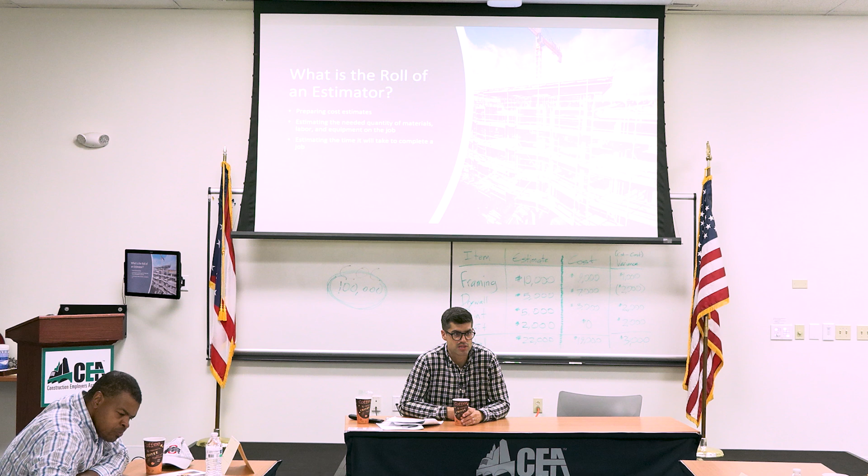There's software that I'm actually teaching a class Tuesday on, Bluebeam and Procore. We typically teach our students in courses like this generalized software. We don't go into very specific ones because companies do it differently, companies use it different ways. We use RS Means to get some historical data, and National Estimator, and other things like this. But ultimately it comes down to your individual process.

I actually came out in 2010, that's when a lot of the technology shift was changing. I remember we got iPads on our first Turner job, I played Angry Birds on it. I just didn't like it, honestly. We would just take pictures and do some RFIs on it and stuff like that.

The technology now is very digitally driven. Our students prefer digital, I'm just not like that. I like hard prints, I like writing things. I'm probably the last of my kind, who's now coming out after me. Some of you guys are like us moving into the future, or who are older from that 2010 period and on, but now the students know it's all digital. I just can't keep things straight.

The problem is you have to be trained in it, you have to be well versed in it. But my general feeling is, as long as your number is accurate, like Mark, if you're handing me a piece of paper and it's accurate, I don't care. I've handed subcontractors schedules on napkins before, and it's worked. We really translate and put value on things that actually work in the field. So don't get too caught up in 'I'm using Timberline' or 'we have to use this or that.' Ultimately, it comes down to accuracy.

We'll make sure we can put it in whatever we need for the Cleveland Clinic or whatever it may be. Ultimately, it comes down to the accuracy of numbers.

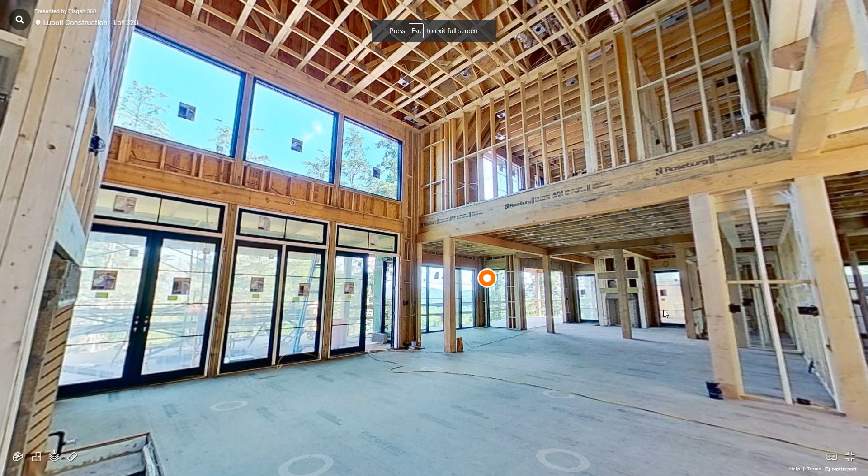Why this is so important for us is we have to build this into our estimates. Here's the cool part with technology, guys: if you can prove the value to the client, it's a moneymaker. You're going to bill that cost to the client and make money off of it. I'll give you guys a great example.

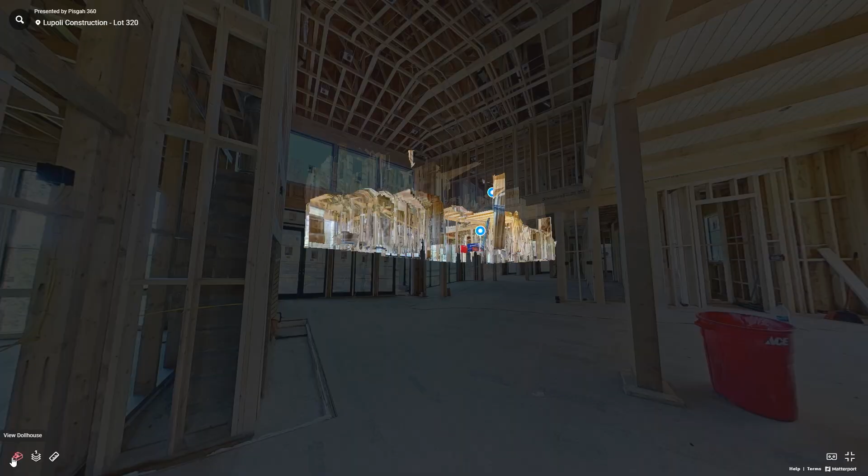So this is called Matterport, okay? Matterport's awesome. It's awesome, dude. Yeah, it is awesome. This is such a low cost, it's $130 a month for a really, really good plan. You can do it from your phone or you can do it from a camera that's here.

What you can do, and I always recommend this for people - you guys should think about this from an estimating standpoint if you're estimating an existing structure - you can go hire a little intern, or anybody, to go around and scan this project for you. This is why I tell you that you should always put your eyes on projects, and this could be a way to do it, okay.

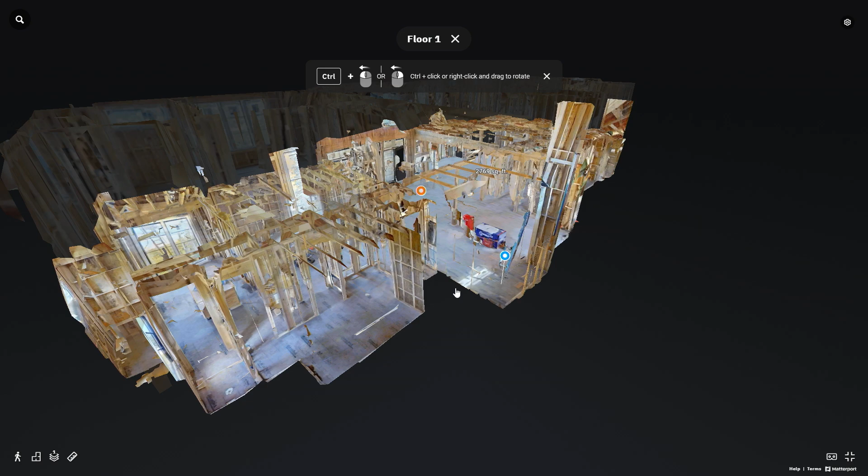What you do is you create what's called the dollhouse view, right? But what's really cool is what we're now doing from a CM standpoint is I'll embed the O&M, operation and maintenance documents, in the file. So we can say, here you go, Mr. and Mrs. Client. Everywhere you see a little circle is where a node was taken, and all you do is set up the camera and it does a little 360, pick it up.

Take it in there, spin it really quick. And what you can do is just bury these nodes, and in that node it could be a YouTube video of how to maintain an HVAC unit, or it could be your warranty documents. So now instead of printing all these things and handing the client all this paperwork, you just say, here's the link.

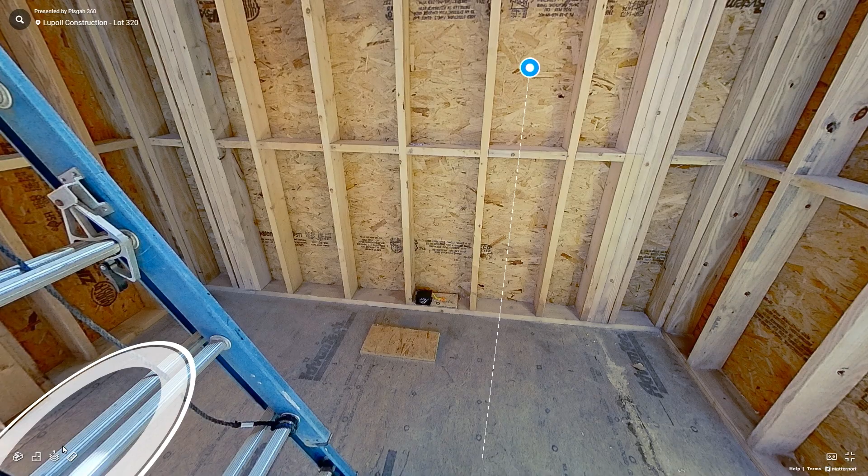You can walk through that structure. And now you can also measure, you can do your estimates completely remote, taking very accurate measurements - that's an 8'1" wall right there. This is such a low cost to entry, utilizing this, that's why I always say there should be no excuse for you not visually putting your eyes on a job, just like Mark's saying.

You have to, in conjunction with all the documents, especially if the documents are getting worse - you have to visually put yourself in this position.

Now here's the cool part. I'm actually doing a study right now. So when COVID hit, inspectors started accepting a lot more digital pictures for inspections. And what I'm trying to really push in the state of Ohio, and I'm getting a lot of pushback from them, is a set of guidelines and standard operating procedures for contractors to just submit visual proof for inspections. So that inspector doesn't need to climb to the 17th floor of Sherwin-Williams and put his or her eyes on the mechanical rough-in inspection - you can just send them a digital file.

And there's a lot of pushback - oh, well, I want to put my eyes on it, these contractors try to cheat. Have you guys ever tried to cheat in 4K?

It's very, very hard. The technology is getting to the point that we can put so much data at such a crisp rate that it's impossible to cheat. With this file, you're on record, right?

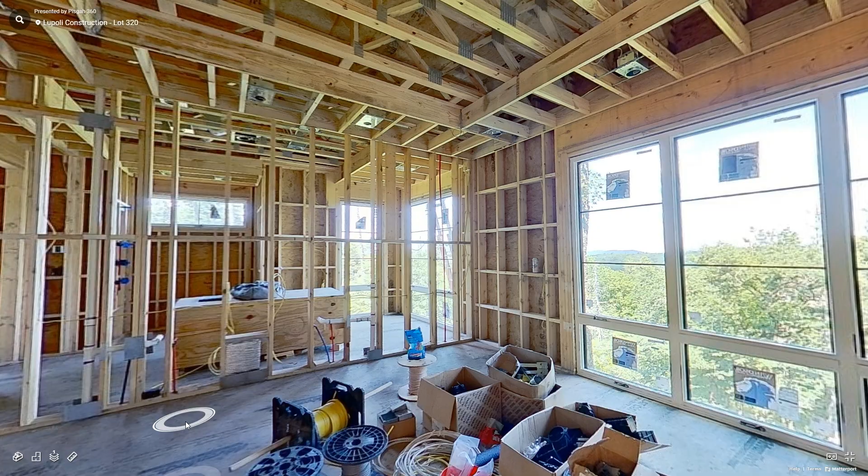It's hard to cheat in 4K. Like I said, you can get real tight, you can see your 12-2, you can see different things, and it's there.

And again, here's how we sell it from an estimating standpoint—I build that cost in. And then the client might say, well, wow, you have this additional overhead cost, but then you show them the value it delivers them. Hey, when you guys go to do a renovation or a change and you need to know where wires are at, I've got your rough-in images right here. You can check it out. You need project documentation, warranty information—it's all there.

And then you build profit into that. So you bill the client $500 a month for your technology and it's costing you $130 out of your pocket. But because you've provided value, just like Turner Construction did with Ladders Last, it's now a profit area for you. But again, at what level do we want to invest in this? You got to make sure it's going to provide you that return on investment.

If you're going to spend a ton of money on AI, you might not see that right now with the level of technology there is. But this thing is freaking incredible—it's called RPD 35. I saw this at ConExpo, a completely autonomous vehicle.

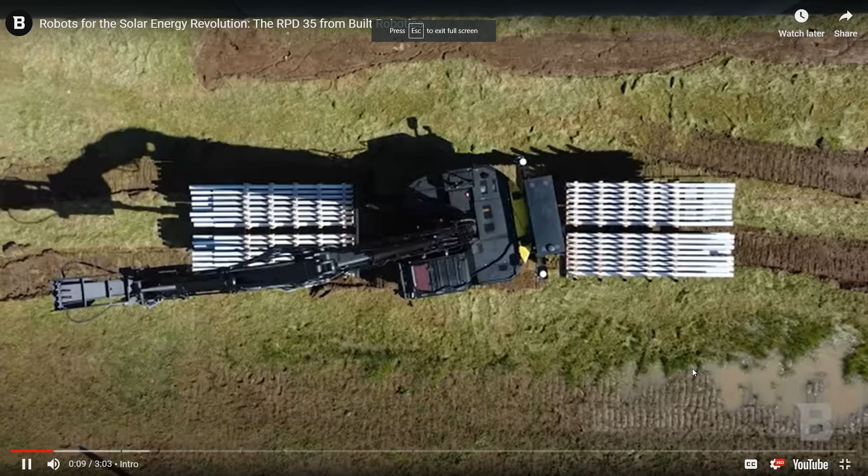Here at Built Robotics, we've developed the RPD 35. RPD stands for Robotic Pile Driver. This system allows for the automation of the pile driving process in the production of solar farms.

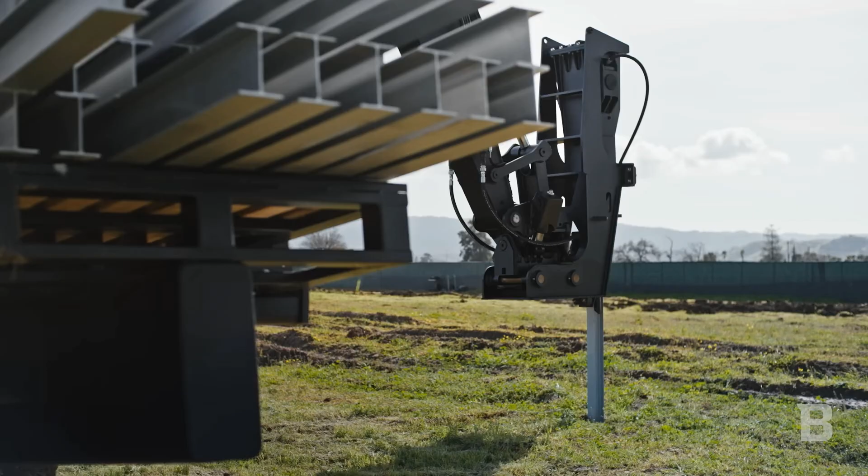The solar industry is going through huge growth. By the way, to give you guys a standpoint from our construction management students, solar is the highest paying, fastest growing segment that we have in the building industry, and they're the highest paying for our students. The money they are putting and throwing at these kids is ridiculous. We're currently at about 3% production, and the goal is to be at like 50%. They're building solar fields.

The kids have sent me pictures of hundreds of acres in Texas, Minnesota, by the way. The technology is there where they're building solar in areas you would never think. If you guys have money to invest in something, I tell people solar. I don't want to politicize it because it's an energy source, but from what I'm observing in the data, it is growing like crazy.

So here's a company and organization that saw, hey, there's a way we can do this faster and better. Just take a look.

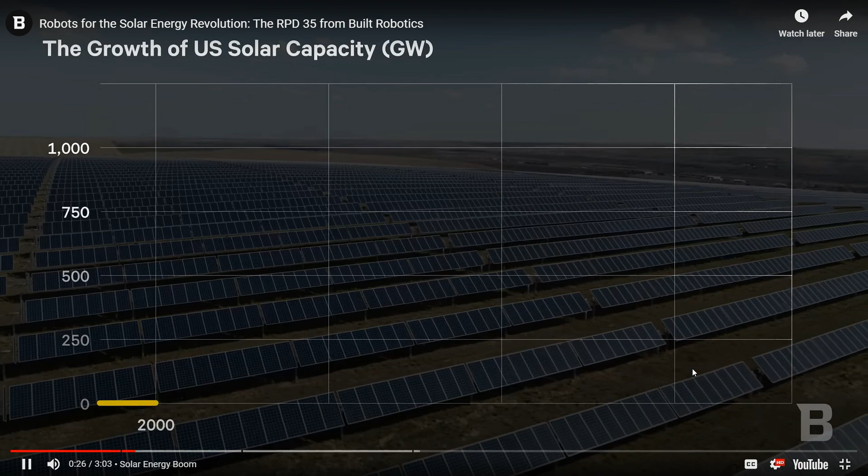We plan to run half of our country off of solar, and currently we're only at 3%, so we've got a long way to go. We're going to see a huge increase in demand for solar energy and renewables in general.

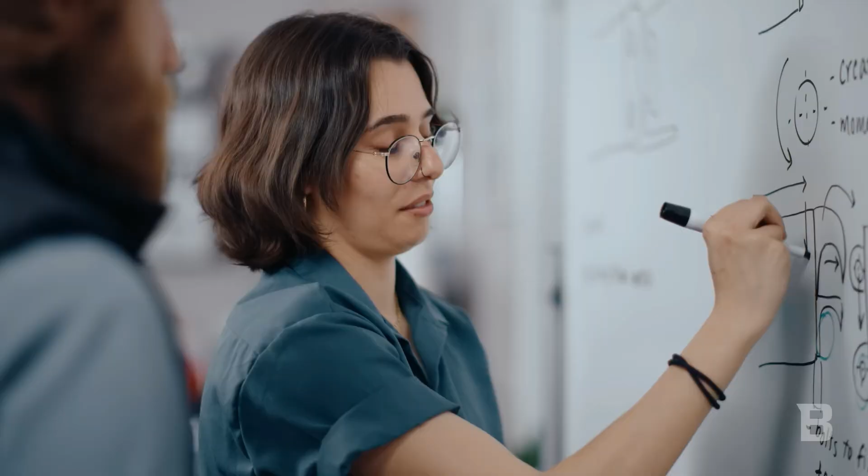I think the most difficult part about manually driving piles is just lifting them constantly. It's a very labor-intensive task, and we knew that we could develop technology and tools that skilled workers could use to improve the process. We're talking a repetitive task tens of thousands of times.

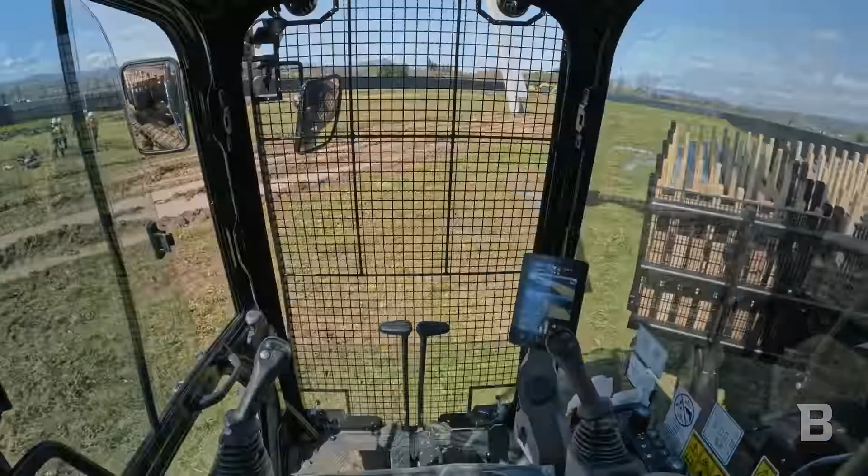This is where automation and robots come into play. Automating these tasks reduces the risk for humans and provides a safer environment. There's no one in there - it's completely autonomous. This process allows solar farms to occur much more quickly.

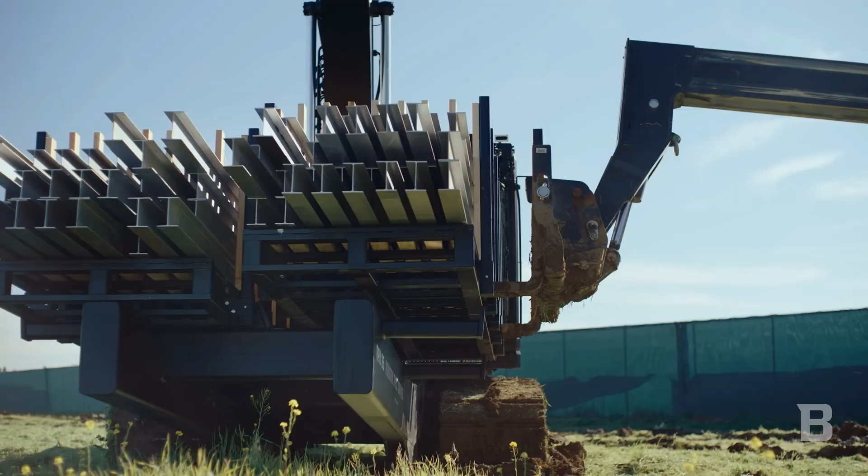They're driving the piles down to sub-centimeter accuracy, carrying the piles on board. No longer do we need to shake them out or distribute them along the property - they're on board the excavator itself. It picks from those on board and does the pull test. Normally for every pile, they'd have to bring another machine to do a pull test, but it will drive it and then do the pull test right then and there.

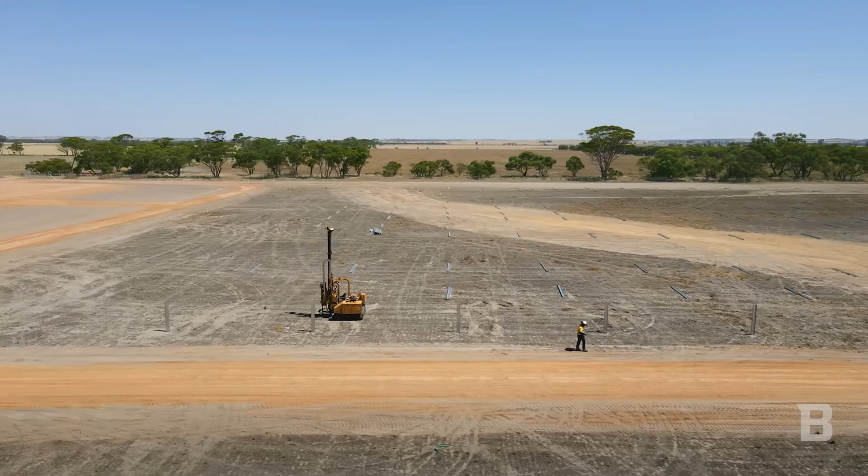Typically, a manual crew is able to put about 100 piles in the ground a day. With the RPD 35, we can get over 300.

The first is a sled, which is tubes underneath the excavator. The second part is the baskets, which can hold up to 200 piles in a specific location - a sexier, cooler way to operate that machinery that I think would attract people.

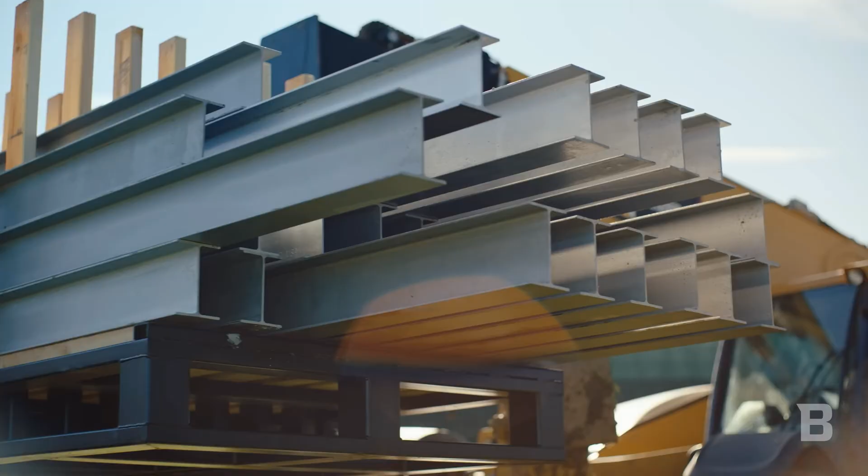And everyone says, well, we're losing jobs. We need this system, which is the brain, not to lose jobs - really, we need people. Our software produces a pile sequence. The baskets on board the excavator are loaded in a particular sequence that allows for placement of those piles in the exact right position and order.

We're talking sub-centimeter accuracy. So now you can be a tradesman and operate technology versus physically putting pile drivers in and shaking out beams all day.

The safety system is comprised of hardwired e-stops, wireless e-stops, indicators for sound and lights, a geofence, a physical safety barrier, pedestrian detection, the Guardian system, and signage on the robot.

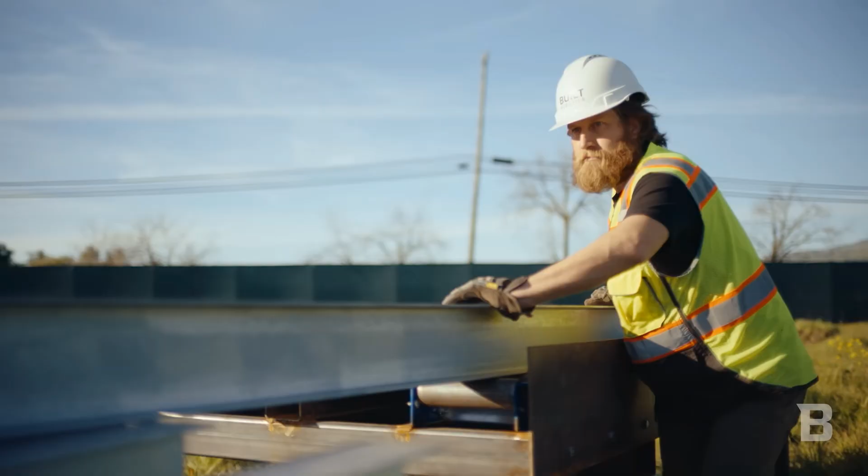We started off with trenching on these solar projects. Today, our latest product involves pile driving, but there's so much more that can be automated in this industry. Here at Built, we're in it for the long haul. We believe that in order to meet the demands of the future, automation is going to be key in construction.

The construction exhibition in Vegas, every 4 years, it's all going this way. One of my coworkers was telling me about some project she was watching on YouTube where the guy was in China operating something in another country.

I was going to show you the video. Oh okay, no I know what it is - the guy's in Germany operating an excavator in South Korea. Oh, there you go, you see the South Korean flag flying? And it might have been - there's other countries that use it too.

So now they're remote operating excavators across the world. When the South Korean folks are going home at 3:30 p.m., it's 7 a.m. in Germany, and that piece of equipment is operated completely remotely from Germany. I'll show you the video here in a second - it's a short clip. You'll see in South Korea it's completely dark and they're still excavating, still trenching, all completely remote.

You guys, we are going to meet excavating contractors who work remote. Literally, I'm a construction heavy operator and I work from home. It's coming. And at what level do we put that in our estimate? At what level can we show that cost? Now, typically this is what we see in the United States, guys.

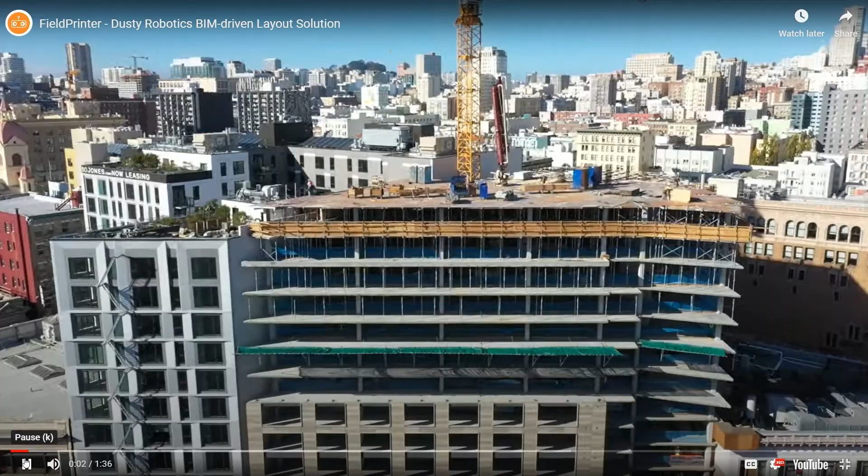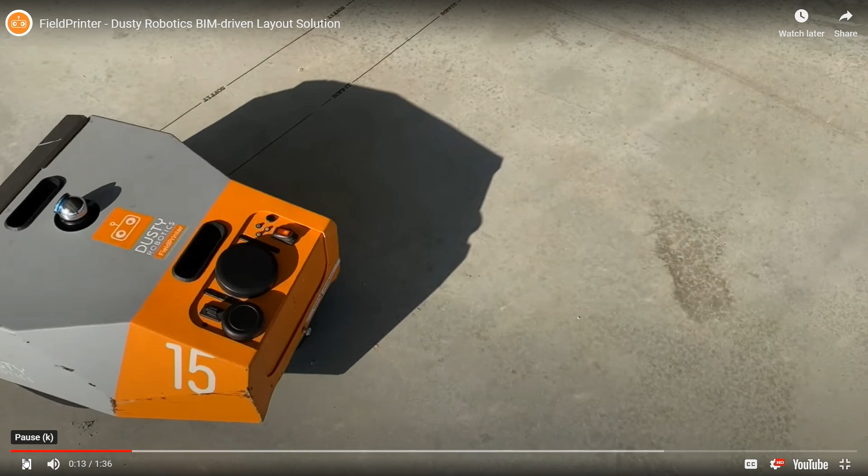Check this out. So we've got our cast-in-place concrete, and we're starting to lay out our stud walls. You upload your file right to Dusty and it prints it right out for you.

So again, Tommy and I aren't getting on our hands and knees snapping lines. I might otherwise need a crew of six carpenters to lay out the whole floor. Here's the other cool thing: it puts your outlets, it puts all your overhead light fixtures, and it prints right on the floor where your stud walls are going.

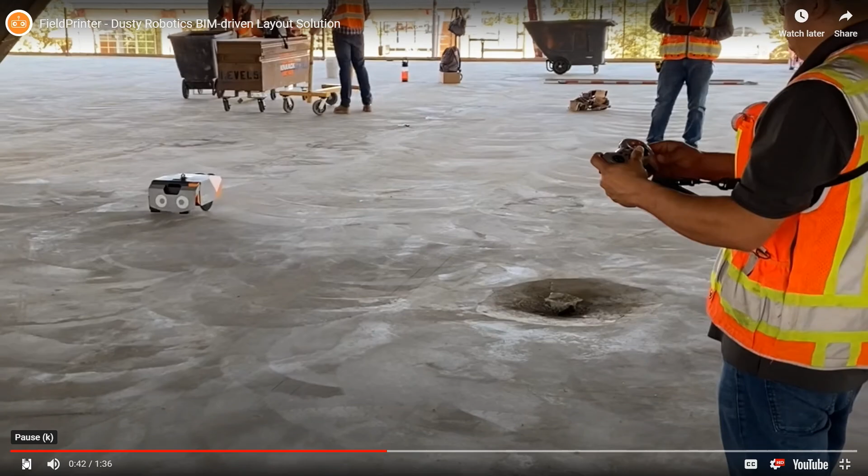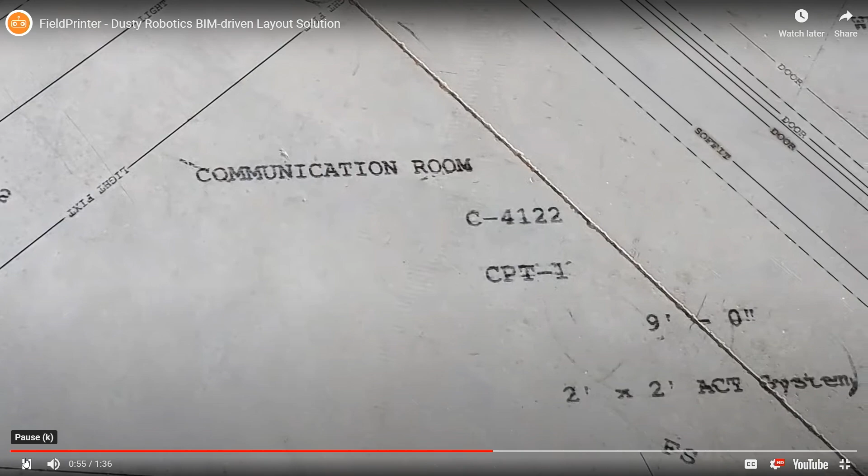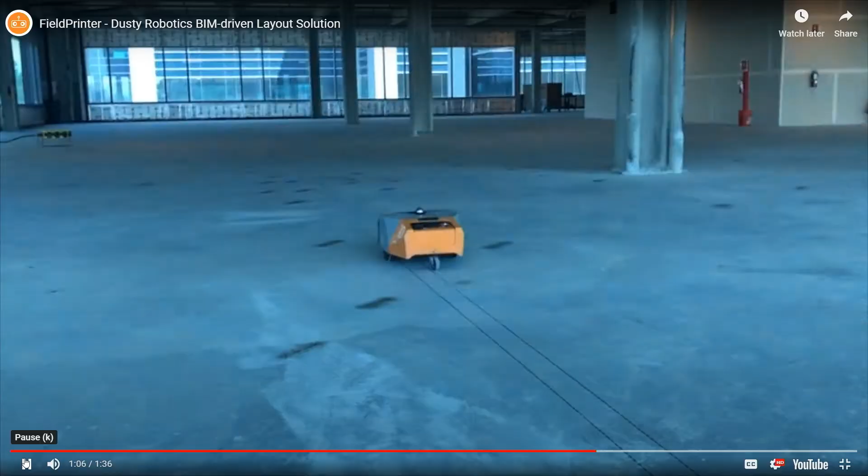So why aren't we training our carpenters on this to save your knees, save your back, save all the thought process that goes behind it? Now, I'm also torn on that a little bit. You need to be able to know how to lay out walls. You've got to know how to lay out walls.

And this, as a carpenter, you're not going to be using on every job, I wouldn't think. Like this room, it probably wouldn't make sense - we could lay this out relatively quickly. So I think integrating this stuff smartly will help us at some point, and we need to think about that from an estimating standpoint.

Wow, we really got on a tangent after the ability to read blueprints, but it's so true. Maybe it's the ability to read BIM models, maybe it's the ability to read a user manual on the RPD 35. These are the ways we're moving in the future, and I believe in our industry we need it to supplement. You need to think about the right investment, and whether our interjection of technology actually works for the bid package we're utilizing.

I've done jobs where it doesn't make sense - we don't need Matterport, we don't need a drone, we don't need any of this stuff. We're just good old, hard, salt-of-the-earth construction. But what we talk about in our class, the one I'm doing on Tuesday with Procore and Bluebeam, is that I do think there's a minimum level of technology.

I don't know if you guys have heard of Procore or utilized that at all. Bluebeam is an interactive PDF. Procore, for example, is a digital platform that houses all of your construction documents - like a cloud drive that the owner can access, subcontractors can access. It really just helps you manage the digital flow of the job, and it's very low hanging fruit - a low cost thing, just like some of those technologies we showed. You can show stuff in real time, access RFIs as a contract manager in Canada, for example, whatever it may be.

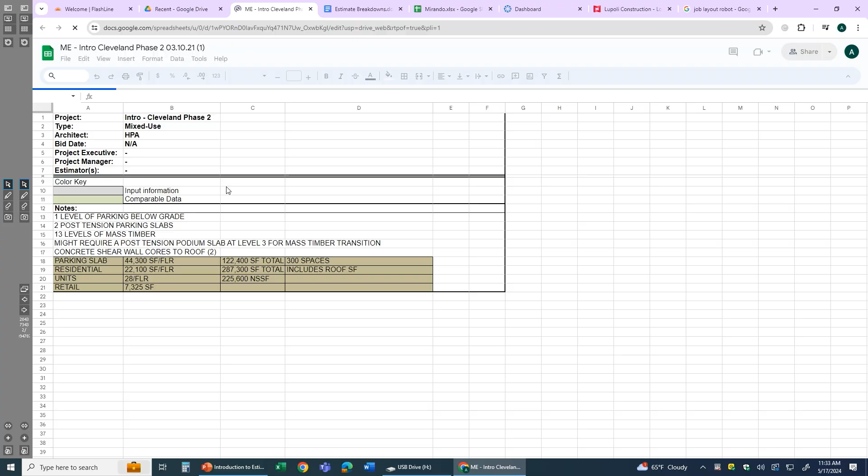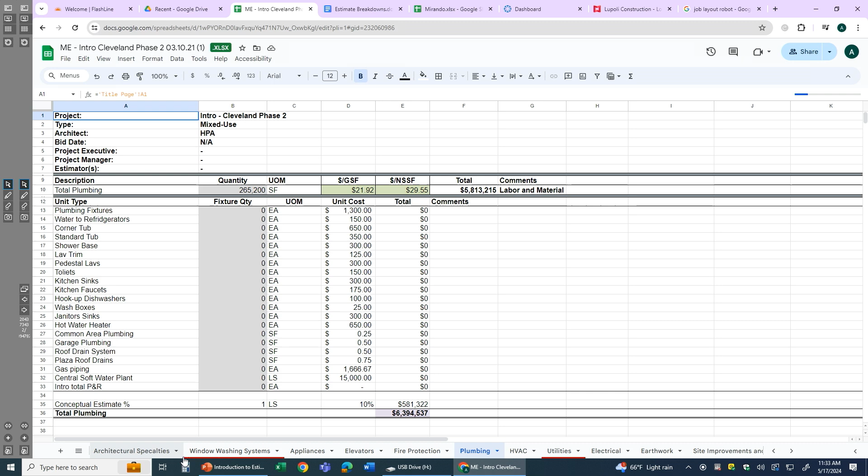Okay, so this is that document I was telling you about where I capture everything. This is an Excel spreadsheet. And if you look at the bottom here, there's a bunch of tabs, okay? On these tabs is where I store my historical data. Is where I put in elevator costs, appliances, fire protection, plumbing, whatever it may be. This is what I call my project ratio comparison. And this is where I store all the historical data for my projects in one central area.

Again, y'all really got to focus on how you store and disseminate data. Have you guys ever sat, like when I was writing or doing my dissertation, I would have like 50 tabs open, it'd take me 7, 8 clicks to get to where I needed to be. And then I'd go, you know how much time I wasted in just clicks, and just not knowing where things were organized or what they were named? I'm telling you, you need to really invest in that. Bill Gates did a study, like he has 6 monitors. If you ever read about any of his productivity, he has 6 monitors up in his office at one time because he's found he can just be so much more productive with that amount of monitors. He spent a ton of time and money investing in his process, right?

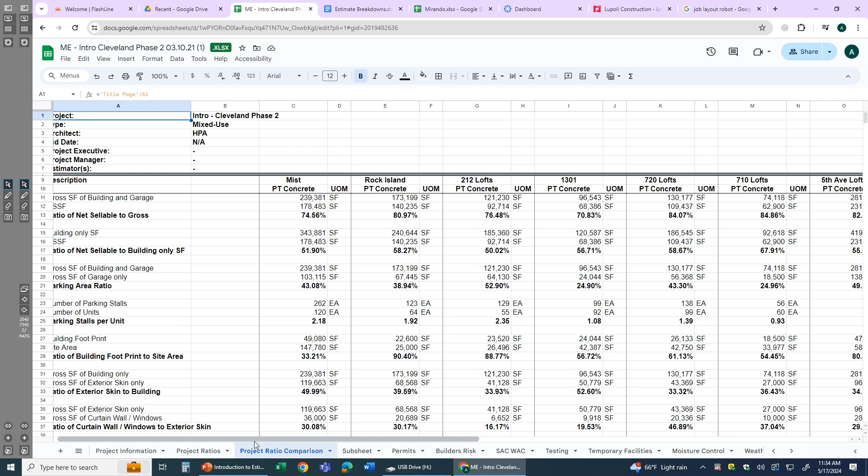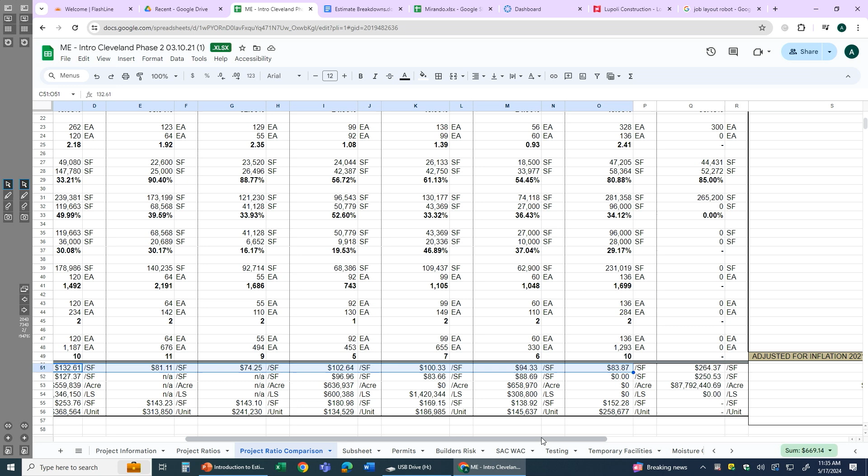So I have one document that I can go back to all my historical projects, and they're all listed right here. What was my price per square foot of concrete? What was the price per square foot of X? What were the average sizes of every project? And these can all come from what's important to you. You guys can determine whatever those want to be. I just know that you want to come up with a methodology that you can say, hey, what is my gross square foot cost with site work? And now I can look at all my past projects, and now all this does is make my life easier moving forward. And you can even see these are kind of all over the place, it's a pretty wide range. $132 a square foot, 81, 74, 102, 100, 94.33. And this is why I'm saying where I think AI is going to be able to be utilized, because it can look at past project data and be able to spit out averages or spit them out moving forward.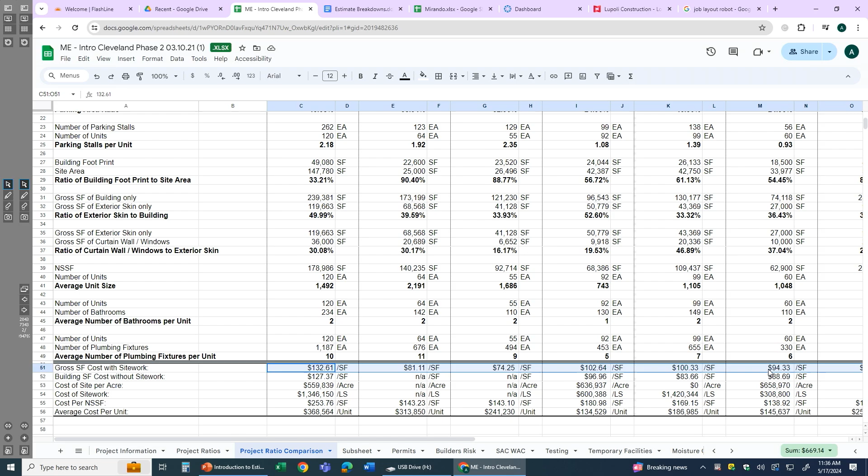They no longer figure out the general overhead for their projects. You know, overhead, by the way, the definition of overhead, we always talk about overhead, okay? But in estimating terms, it's the things that are required to put the work in place, but don't put work in place. Porta-johns, job site trailers, printers, coffee machines, me, you. We don't put work in place, but we're needed to put work in place, right? They don't even bother breaking all that down. They just say 10%.

10%. That's all based off of this. So what do they do? They invest their time in determining the actual accurate cost of construction, and they say we have 10% in overhead. Why are they basing that off of? You don't just pull it out of your ass. It's based off of historical data. We've done so many projects that were 8%, 11%, 12.5%, 7.5%. It's an average of 10.

We put 10 in and we move forward. That's it. And that saves them time and headache, and it allows them to invest in the actual items that are important on your job site. General overhead and conditions is important, but they have so much historical data built up, I'm not even thinking of wasting time on that as a project manager. I'm investing in that post-tension concrete contractor that's doing my job and is going to be really impactful.

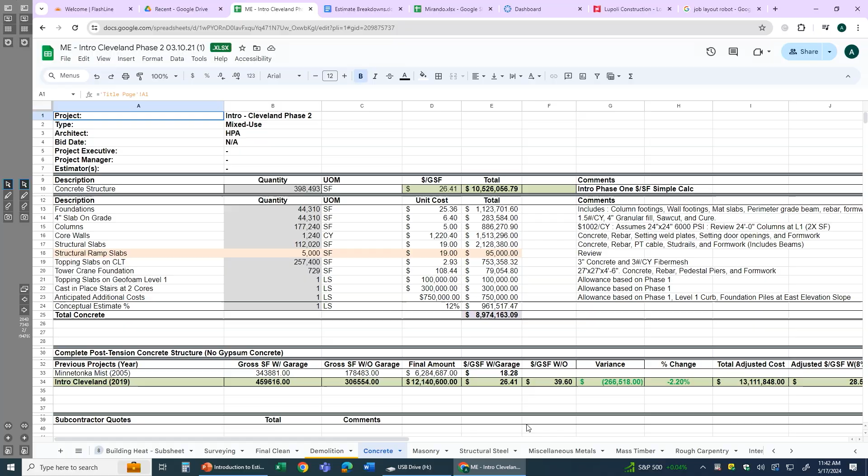So data management, tracking the content, and actually having the data in a format that you can communicate is the actual hardest part. And then you can use this thing - I've used it so many times to just save my ass, have data to back it up, and be able to make a concrete argument. Or if I'm in need of a time, I just put a number in. When I'm evaluating bids, I go here and look at my historical costs.

Right? It really helps. So we got miscellaneous metals, and then mass timber is just a beast of its own. Then you're gonna run into these where it's like, okay, how the hell do you cost mass timber out? And what you can do is draw comparisons to different types of construction to help give you a ballpark range.

I also have ranges for every single specification now. So in general, I know where my MEPs fall on a price per square foot. Does it mean it's perfect? No. But if I know in general I need to be at 10% for my general and overhead conditions, that's a pretty good starting point. If I know I'm at 25%, something's wrong. If I know I'm at 5%, something's wrong. So I can't underscore enough how important general ranges for each specification section are, to check your work and see if you're within the ballpark.

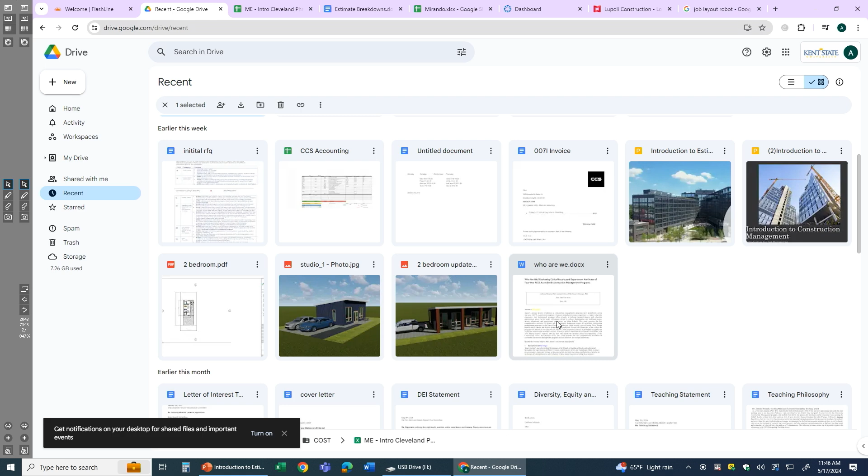This Google Drive just has all these different documents that multiple people can access and edit in real time, and you can use Microsoft Excel spreadsheets. You can do all kinds of stuff within it, and it's just really easy to be accessible. Here's an accounting spreadsheet my colleague and I do and use. We can both access it, we can track the changes.

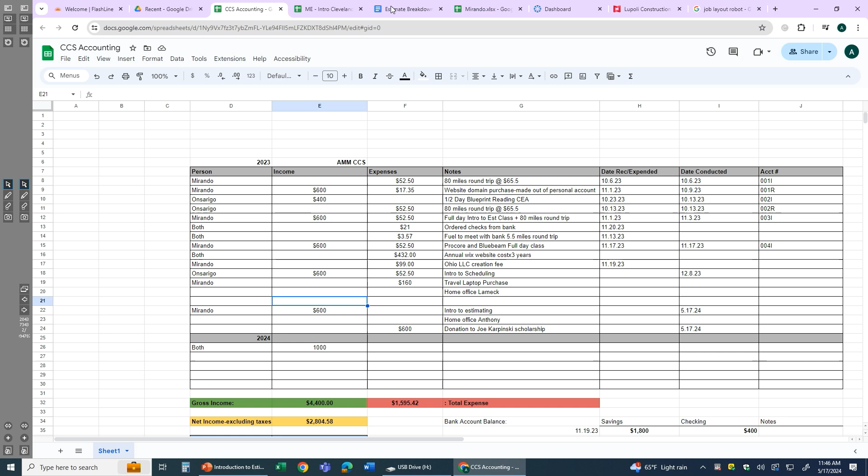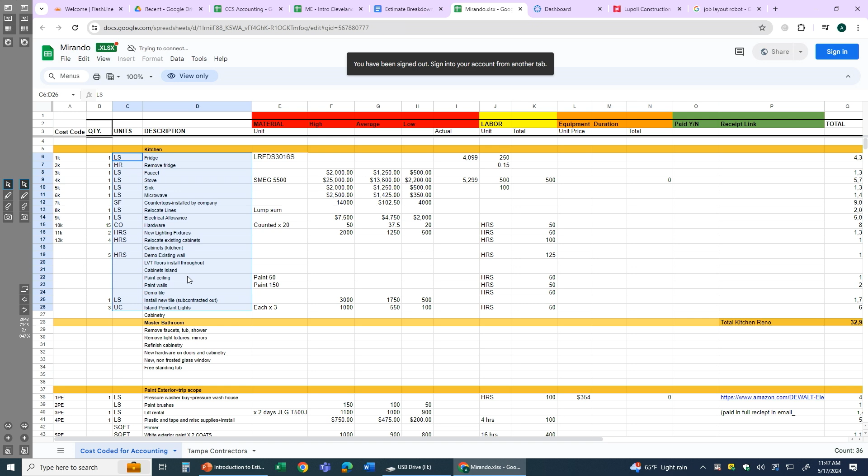We all have a different, and what you'll notice is on estimates, they all look a little different. I don't have one estimating sheet that I use for every single project. This is for my brother and his wife for the house down in Florida. I put it in layman's terms because of who's evaluating my job. But then on the back end, in that big Excel spreadsheet that I have, that's where I keep all the data for me.

And I'm like, hey, guess what, we're paying this tile guy $7 per square foot to install tile. I'm capturing that data on the back end in my spreadsheet, in my central location where I'm tracking costs. So I know in Tampa, Florida, the average price per square foot for a quote to install tile is $7, because I've evaluated 3 bids, that's the one we went with, and now I've got that data. I'll put that in: Tampa, Florida, flooring install, $7 a square foot. Boom, I got it. You'll never forget it, you have access to it.

So I know if someone quotes me 14, I'm gonna say, what the fuck? I got data. And most contractors, what are you gonna say when you show a spreadsheet with that and you're like, dude, look at all this data, these are the real actual costs that are here. It just gives you a lot of legitimacy.

And we did a survey of like 250 project managers. You know the number one thing project managers want? Predictability. Think about it, if you could have one thing on your job, it would be like, if you tell me this is gonna cost $250, I just want it to actually cost $250. To be able to predict, my schedule says 2 weeks and we're gonna hit 2 weeks. Predictability, that's it. That's what they want more than anything, to be able to actually be accurate in our predictions. Using these types of things is gonna help give you that.